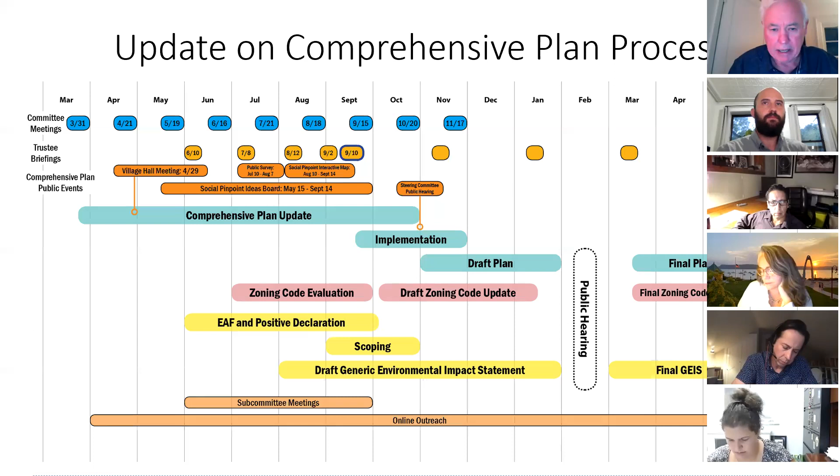So the next slide just goes through the basic introduction to this. When we started, we talked to Stuart, then the manager, and then Jaime as your planner. We've divided the zoning effort into two different groups. One is code maintenance, housekeeping issues within the code, some of which are very important, like definitions in the code and consistency of one part of the code to another. Village council, the building department, and Jaime Martinez are going to take the lead on that.

But issues related to the comprehensive plan, addressing issues raised in the plan, this is one of them, as well as the waterfront. So downtown and the T district are things that we'll be doing. Tonight we'll stress basically the downtown, and we've added also the Croton Avenue area. So that's the distinction between the two.

Jonathan is working now on amendments to the T district with Jaime, and also a new district idea we've had, a contextual district for infill housing and townhouse development, which was suggested to us in site visits with the manager, Karen, and Jaime. The idea of this MF3 district is it will fit right into your code and could be mapped after adoption of the comprehensive plan, but it will simply give the trustees another option for what we call the missing middle, as planners tend to call it. That's a zone a little between the T-zone and some of your existing multifamily zones in the code. But those two will come separately through Jaime and Stuart.

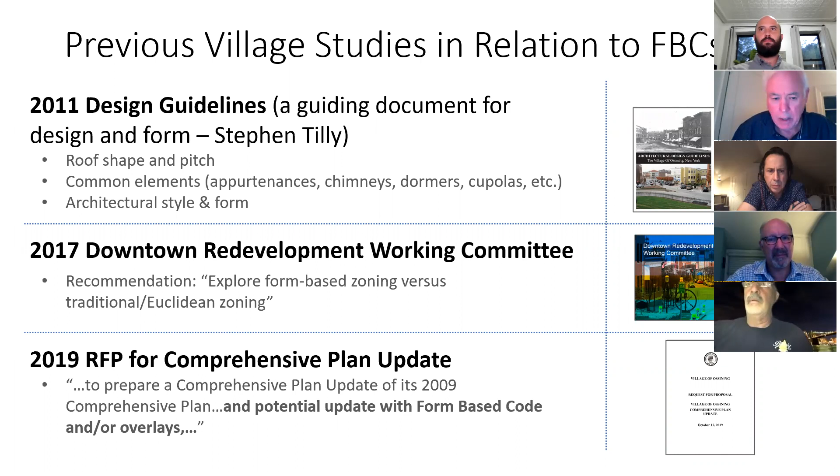I wanted to mention that with the form-based code, we're very cognizant of work that we regard highly, and I think the village does too - that was 2011 work by Stephen Tilly and company on design guidelines. We think this form-based code and Stephen Tilly's work can work complementary to each other, so that the planning board would still be able to use Stephen Tilly's work and at the same time use the form-based work. We're also looking at the recommendations out of the Downtown Redevelopment Working Committee on form-based zoning. So with that, go ahead to the next slide, Mark.

I'm going to, at this point, turn it over to Jonathan, who will get into the basics of the form-based code. Thanks, Frank. Good evening, everybody. I'm going to go through a few slides before we get into some specific details led by Mark, but I thought we might begin by defining what a form-based code is.

It's a relatively new type of zoning. It's been around for about 38 or 39 years, but over 90% of what's been adopted in the country has occurred since 2001. It's a type of zoning that really focuses on the built results, making those more predictable, and a high quality public realm. It does so by emphasizing or regulating building form, rather than separation of uses. It uses the physical form and the building's relationship to the street and the public realm as an organizing principle.

And if you think about it, it really makes a lot of sense, because you're interested in a variety of elements about zoning, certainly density, height, setbacks, these kinds of things. But if you use a form-based code, you actually prescribe how a building relates to its context and to its street.

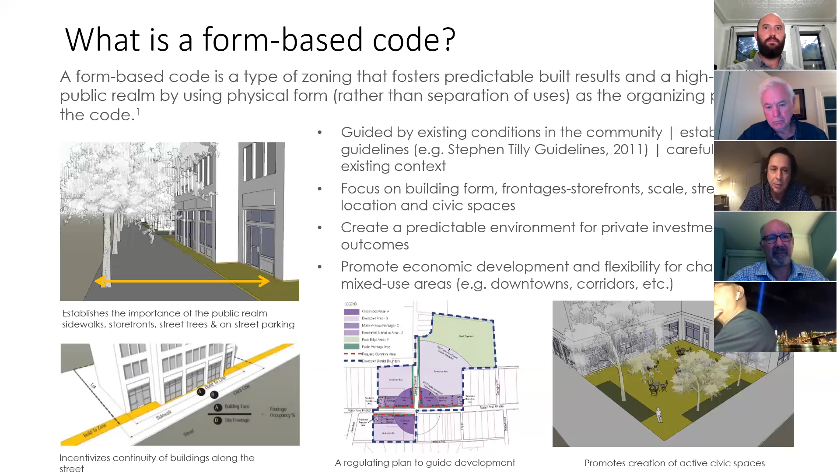So here is just a very light comparison between the two types of zoning that we have.

Thank you. So the typical zoning is called Euclidean zoning, and it has a focus on use. So really it came out of this idea of separating uses. Design is secondary, and it's often handled in a separate process. And that's indeed why, back in 2011, after the 2009 plan, there was this call to create those design guidelines.

So we had a guidebook, a guide to inform developers on the kinds of things that the Architectural Review Board, the Planning Board, and indeed the community was expecting. That focus is really, in Euclidean zoning, on internal lot parameters.

So if you look at most of the zoning in the country, and indeed your village code right now, it will tell you a lot of what you have to do on your site. In fact, it doesn't even reference the outside at all. And so the focus here is usually setbacks, yard widths, minimum height or maximum height, minimum yards, allowable density, and things like this.

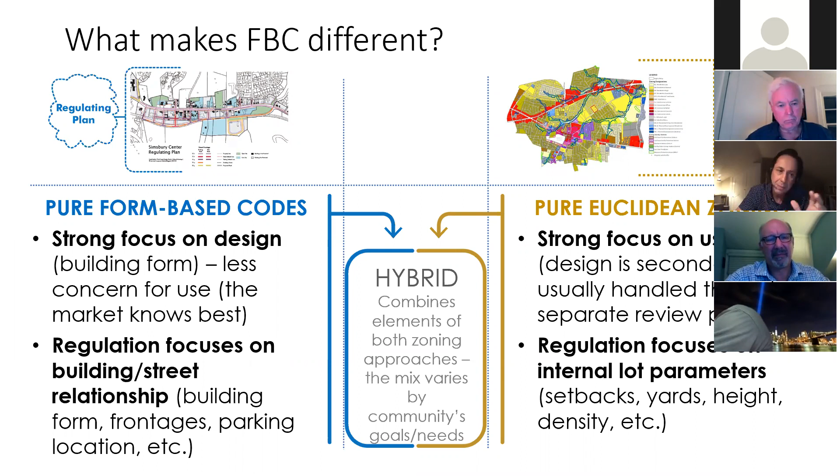The way a lot of people are going these days, and in fact the way BFJ Planning has approached this prior, is through a hybrid approach, which takes some of the best and the strengths of Euclidean zoning and some of the strengths of form-based codes. And so what we will talk about is a hybrid approach this evening.

If we could go to the next slide.

So there are three key concepts that are integrated, or can be integrated very easily, with form-based codes. These work well with a hybrid approach, and that is doing an overlay. An overlay zone is a special district that's created, and it places over the existing zoning. So the existing zoning stays in place, but the overlay identifies some special provisions in addition to, or instead of, those underlying the base zone.

Overlay zoning has been around for a long time. It works very well, and it accomplishes something else that is not in this definition.

It allows existing property owners to continue as they are, and they can opt into the new zoning if they like. If not, they can stay. That's very different than going in and changing the whole zoning, because then you end up with a lot of non-conforming uses or buildings. So this hybrid overlay approach is very efficient.

Incentive zoning is a tool that allows new development in certain areas, wherever you specify, to voluntarily achieve some extra floor area or other specified benefits that provide public benefits identified in the code. Incentive zoning is used to ensure that new development contributes, for example, to infrastructure investments where needed, or the provision of civic space or whatever it might be that is defined by the community.

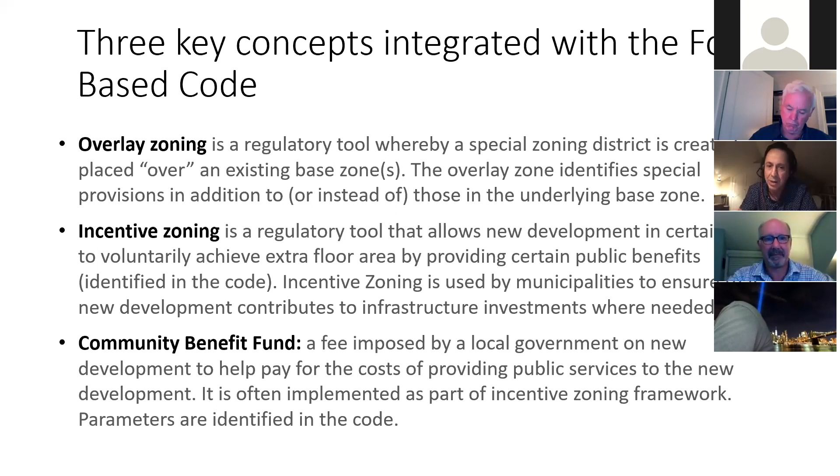It can be tied also with an overlay and the form-based code. So we've got these four elements working together: a form-based code, an overlay idea, this idea of incentive zoning, which is how you opt in—if you opt into the overlay and the form-based code, you get an incentive—and then the idea that there can be a fee imposed to pay for provisions that the community is interested in.

So the approach I've just spoken about—I'm going to talk very quickly about two local examples. One is a smaller village, and the other is the city of New Rochelle. Even though the internal parameters are a little different between these two—one is a village, one is a fast-growing city—the principles are the same.

If we take a look at this, they both specify or target key areas. They both work through this overlay concept. They're both hybrids, meaning that they regulate form and use. So this hybrid approach is very efficient, as I said, and they both include incentives.

In the village of Mount Kisco, this was some additional floor area—the ability in a particular area to do residential use that the underlying zoning didn't permit at the time, and slightly more height to make all of this work as part of that incentive.

In New Rochelle, the incentives are floor area bonuses, and they're quite dramatic. As you know, they have some very tall and even taller buildings going up in New Rochelle at this point. Not the context we're talking about tonight for Ossining, but this idea of an incentive encourages and incentivizes developers to opt in and do what you want them to do.

Great, thanks, Mark. Do you want to go to the next slide? Okay, so similar analysis, but this is for Croton Avenue.

And this is the NC2 district here. You've got some other zoning districts that come down, but again, a similar analysis of stronger frontages and weaker frontages, stronger shown in green and the weaker ones shown in red.

Now, I think Manny at some point at a previous meeting asked what I meant about stronger and weaker. Really it is back to a sense of completeness, holding the building-street relationship together with more continuity at various points.

So if you can see along Croton Avenue down towards the CVS and the supermarket, right there, the supermarket has a small wall with some wrought iron fence. That's a very different experience than even right across the street, where you have a relatively new 3-story building with podium parking shown directly above in the photo. That, in terms of its building-street relationship, is a very strong condition for a corridor, especially as it approaches closer to downtown.

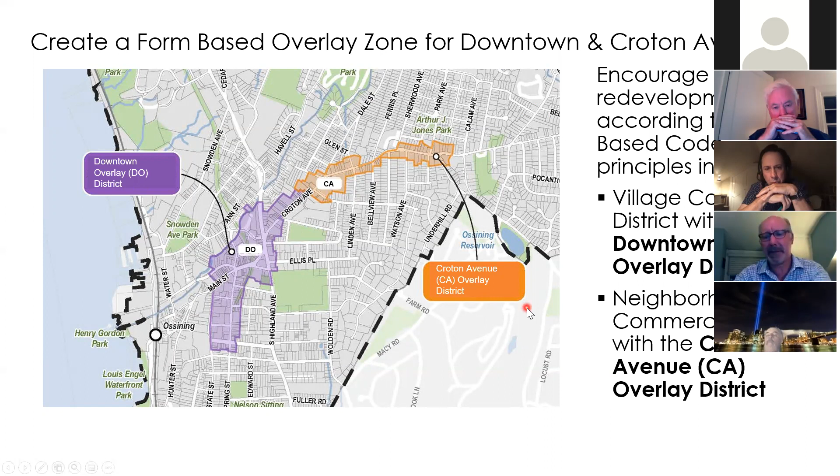So that's the where. In terms of, I think you heard Jonathan talk about the role of overlays and incentives to encourage a better quality and caliber of buildings and design, the concept is that opting into the overlay requires, first off, participation in the community benefit fund.

We have to work out exactly what dollar amount that might represent. But the key concept is that those community benefit funds would support improvements to things like parking and civic spaces, or possibly schools. You all can decide where those funds should be prioritized.

When an applicant comes in and says, hey, we're interested in opting into an overlay zone—in this case, the downtown overlay—the underlying zoning allows 4 stories and 48 feet as the maximum building height. And the underlying zoning places residential uses as a conditional use.

In these areas, residential is only permitted if there is a commercial use underneath it on the first floor. So it's a fairly limited set of circumstances where you could have residential over commercial.

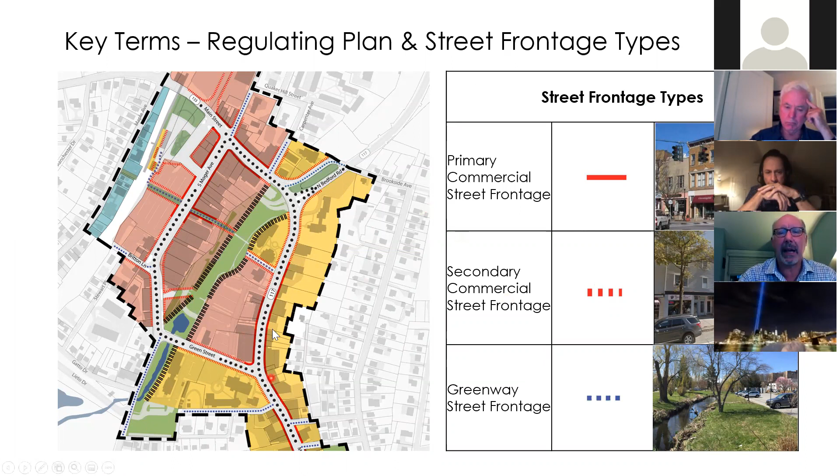So that's this notion of street frontages, where you're setting the rules for what's the character of that street or that piece of a street.

One of the goals of many downtown or village neighborhood commercial areas is to create active environments where pedestrians feel welcomed, where outdoor dining feels comfortable, where the sidewalk is gracious and large enough that people feel they can walk along it. Maybe there's some on-street parking or some benches, but this notion of where the private frontage — storefronts, windows and doors — meets the sidewalk is the interrelationship that makes successful commercial districts thrive and great neighborhoods feel comfortable.

So typically in the code we may call for a certain frequency of doorways or a certain minimum percentage of glazing or windows so that they feel right. If this was an outdoor dining area but this was 100 feet of blank wall, it wouldn't feel like people belong there, and if there's no entrances, there'd be no reason to go in or out or be on the sidewalk. So we want to make sure there's at least a minimum amount of visibility in that area.

A couple of the other key concepts, I think I showed them in the diagram earlier, but this notion of a build-to line, this gold line right here, is usually within a few feet of the front property line.

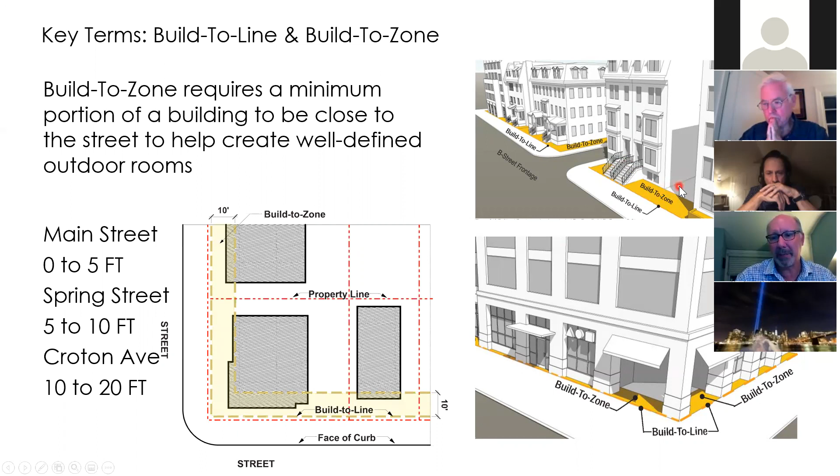These diagrams show an example of how a storefront comes up to that build-to line and occupies most of that frontage. Here you see a townhouse style building with a walk-up, where the building isn't all up to the street. There's some sort of a side yard there.

I wanted to ask, just to clarify for everybody in case it's not clear: in the current zoning we have setback minimums. This would include a setback maximum as well. So that is correct, a minimum and a maximum.

It doesn't mean every part of the building has to comply with that. This concept of frontage occupancy says that in your commercial district, buildings should occupy at least maybe 60% of that zone as a minimum, whereas in a typical residential street maybe that's 40% of the front lot width. So if your lot width was 100 feet, the building should be in that yellow build-to zone for 60 feet of the 100 feet. If it's a residential property with a 100-foot wide lot, the building should be 40 feet wide in that yellow zone. So it sets a minimum norm.

We create these outdoor rooms that we think are a core element of what makes for a successful street, particularly in a commercial district. If we had a storefront on this side and a storefront on this side, and then 100 feet of parking lot in between, when a customer is walking down the street considering whether to go to that next block, if there's a 100-foot parking lot with no activity, no storefront, nothing to look at, no street trees, no landscaping, many people will turn around. So many neighboring properties could be unsuccessful in getting customers because somebody was allowed to build a big parking lot in the middle of what was otherwise a thriving commercial street.

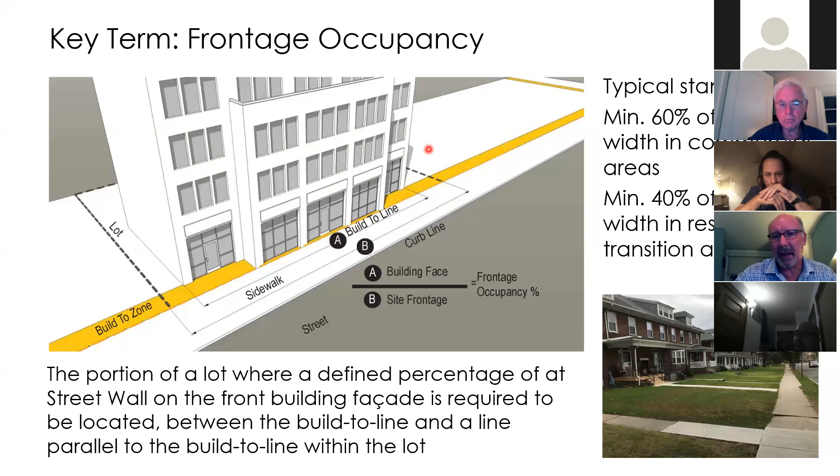I wanted to follow up on that statement. There's this one spot where Croton Avenue actually gets broken up by Walgreens, where there's a big interruption with a huge parking lot set out in front that didn't necessarily need to be there, not in the front at least.

So I think now I'll introduce a couple concepts as to how these form-based code principles could apply to Ossining, to the two districts. I think we really look at this as us looking at the DNA of your community, both the architectural DNA and the urban form, and making sure we understand it and replicate it. I'm not talking about copying buildings, but at least making sure the forms are similar.

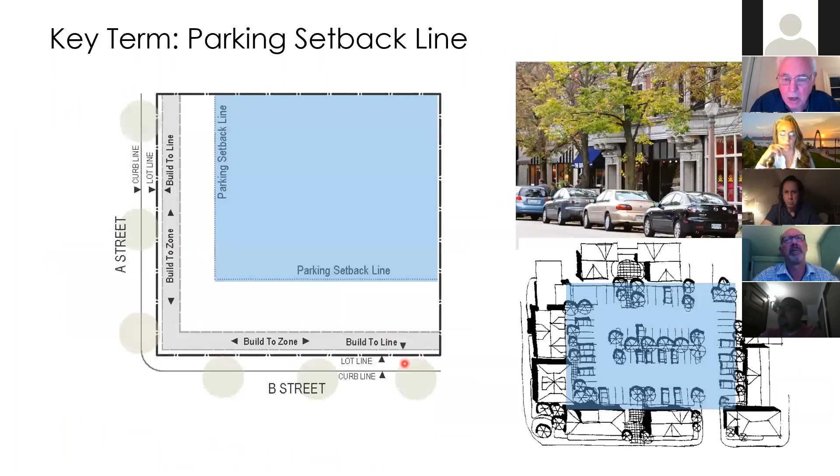You might want to go back to the two maps that Jonathan covered, just so the Mayor sees them. And Mayor, to your point, I think...

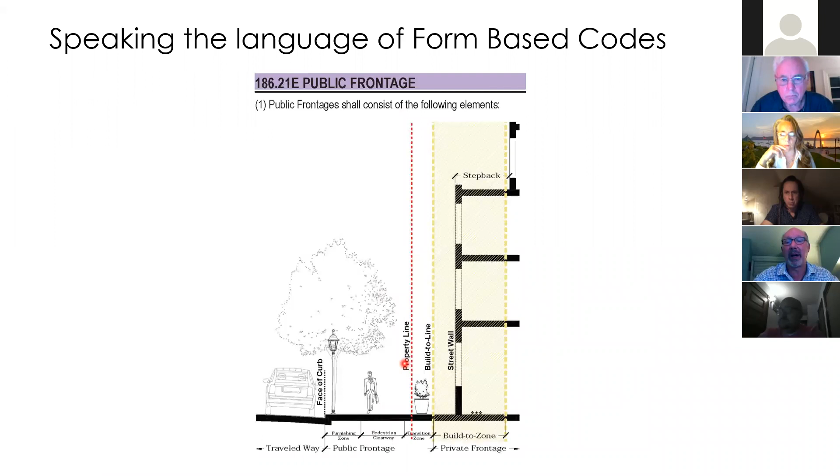These regulating plans, we do need to go through a process of vetting what should they be, which streets are most appropriate for primary commercial, which ones are most appropriate for secondary commercial. These are up to interpretation, and obviously ultimately we're prepared to make some recommendations, but it certainly may need to be refined as we go.

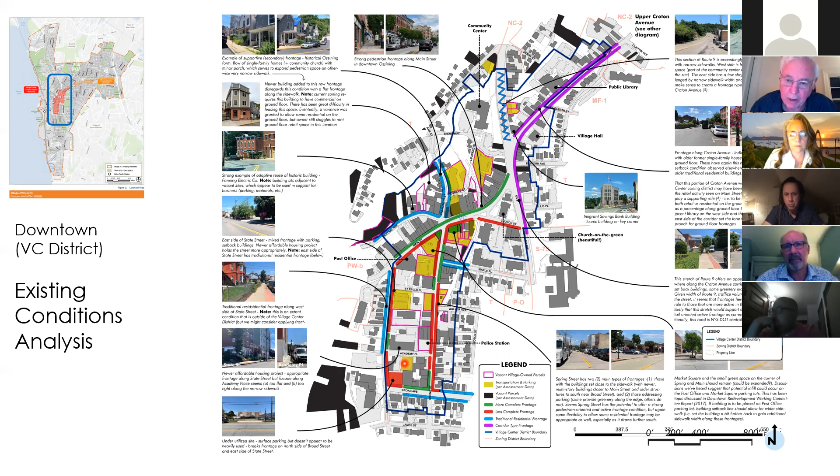Yeah, these are the two maps, Mayor, the existing conditions for downtown, and thoughts from Jonathan and Mark on the existing conditions. As Mark said, these existing conditions set the basis for the form-based code. The second map here does Croton Avenue in the same way. We did these simply because, remember our waterfront walk, we wanted people to have a map for downtown and a map for Croton Avenue to make notes on. But at a later point, since we haven't quite completed everything yet, we wanted to get your input this evening, and then Jonathan and Mark would follow up and make completed maps of recommendations for downtown. Would it be possible to include a map of what we were looking at just previously?

If we're talking about the existing conditions and how that would translate into the different districts of commercial versus secondary versus neighborhood, I feel like we'll do half the conversation and we may not get to specifics, like I personally think secondary business should be permitted all the way up to Broad Street, up both State and Spring. But I'd like to have that conversation with you when we're there, in case something else comes up. Those are things that jumped out at me while you were talking today.

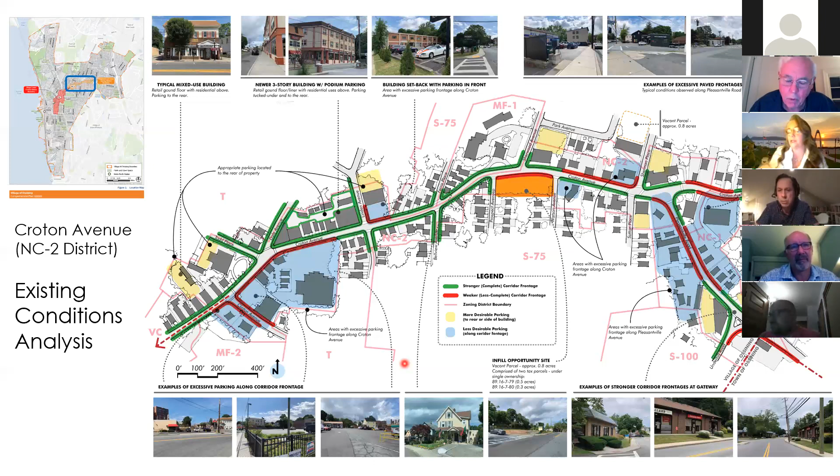Yeah, we can try. To tell you the truth, we made copies of these maps just today, but Sylvia is in the office tomorrow, we can try to make it work. I don't want to promise it though. Instead of creating more paper, if this is going to be available to us electronically, then I can just look at it while we're there. I'm just telegraphing my question, I just want to be able to have that conversation when we're in the field, rather than going into detail now, because I may be imagining something that when we're there, I'll see it differently.

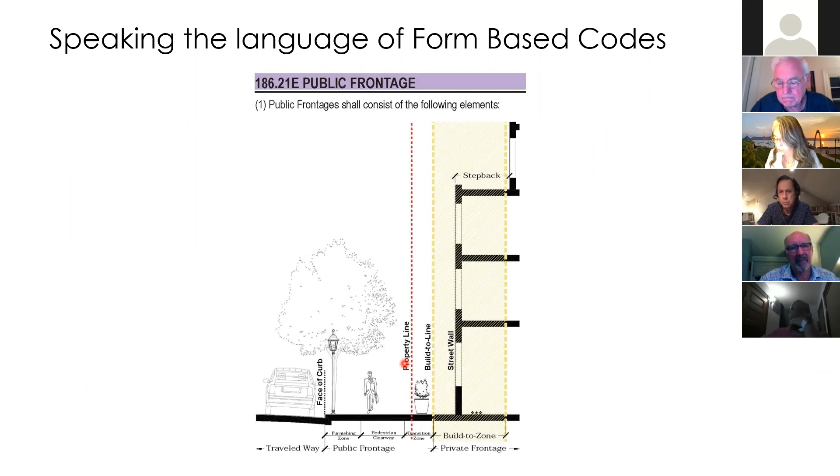So then the one other question I had is, you did that really helpful conditions page on the frontage with the different pictures of existing buildings. And then when you get to the next one where you show on the bottom row what that looks like, those are really helpful for understanding frontage.

One question I'm going to have when we talk about the overlay zone and the incentives for height. Right now, so this is one, the 147 Main Street infill right across from Market Square is a 5-story building. That's one of the only 5-story buildings in downtown right now, so I don't think there are very many buildings of similar height. I don't remember the specifics of how that was incentivized and permitted, that was built my first year on the board, and most of the negotiations had happened before that.

We do have some buildings that are now as of right, which is commercial mixed use with 3 stories of residential on top. I can picture one for sure on Spring Street. So one of the questions I'd be asking when we talk about incentives for these overlay zones is, are we starting at the right point with as of right as 4 stories and incentivizing 5 stories? Or should we consider as of right as 3 stories, which is actually what exists most places as the max with few exceptions, and then incentivizing 4 stories? So that's one of the questions I'll have.

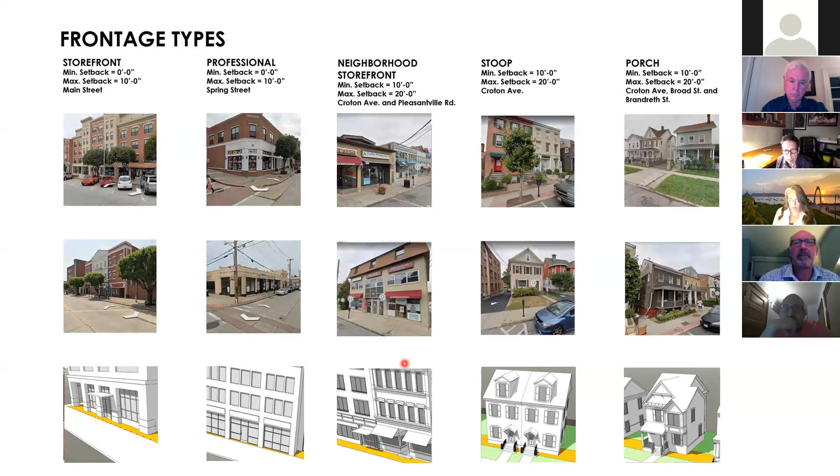Thank you, Mark, and that's helpful. So if you were to go back to the last map where you were talking about — that one right there, no, the one before that, that one right there. So the primary use that you were talking about, the frontage, is, if I'm looking at the downtown, Main Street, parts of Spring Street, St. Paul, and a little bit across the street from Waller, sure, and then parts of Church Street.

We already have that, you know, the commercial part. We have part of the commercial and the retail, and we have residential on some of them, not all of them, on some of that already. So, you know, how is that?

And I don't see, you know, obviously as a village, we want to try to maintain the character of a village. I personally don't want to become, you know, New Rochelle. I don't want to become Yonkers. I'm not opposed to development, but I want to make sure that, you know, my concern is how do we make this work to what we have?

Because portions of this, if we were to go to a form-based code, if let's say we do all these things, if a new developer comes in and says, look, I want to do this, and we are meeting all the categories that you stated in form-based code, they don't have to go in front of the zoning board to get a variance for, you know, front yard, side yards, or even parking at that point. But that's what I think — when we start getting to a little bit more of the details, I want to understand that better.

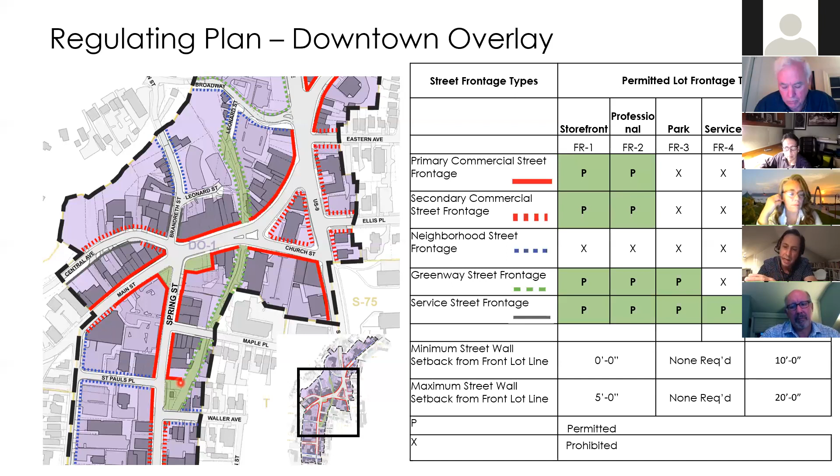The form-based code, at least in the secondary frontage, would give a bit more flexibility. You could still have a portion as retail, but also have a residential lobby entrance or a forecourt. That flexibility is not currently available in your code, so that developer would have to go before the ZBA through a long process.

I'm not saying we have it right—the mayor brought up great points, like let's look at these frontages more closely. But what we're trying to do is build in more of that flexibility, and book it in, saying here's what you can do, because we've decided this is what's going to work. It's not one size fits all where everybody has to do commercial across this massive swath of your downtown.

The fine detail and diversity of frontages contributes richly to downtown. Finally, allowing residential more easily downtown is a very strong plus, especially given the retail conditions, and the fact that having more people living there as patrons would make that downtown a living environment. That's where we're coming from—we're not saying this will encourage development everywhere. The existing zoning remains and protects existing property owners.

I'll stop there. Maybe Mark has about five or six more quick slides. If we could show those, we could give you a big picture.

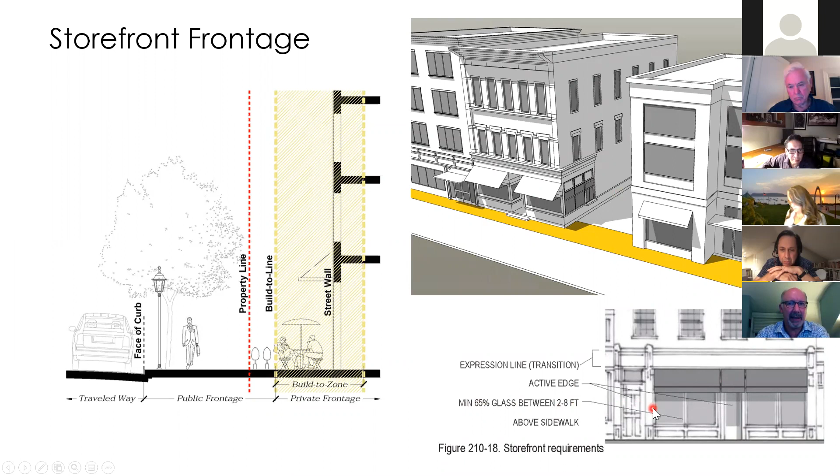So the diagrams we identify for each of these frontage types show storefronts as a frontage type, with some minimum amount of glazing, maybe 65% or a certain amount of glass. A blank wall doesn't make for a storefront, so we need some minimum amount of glass along the street. Here are examples in your downtown where that kind of frontage exists.

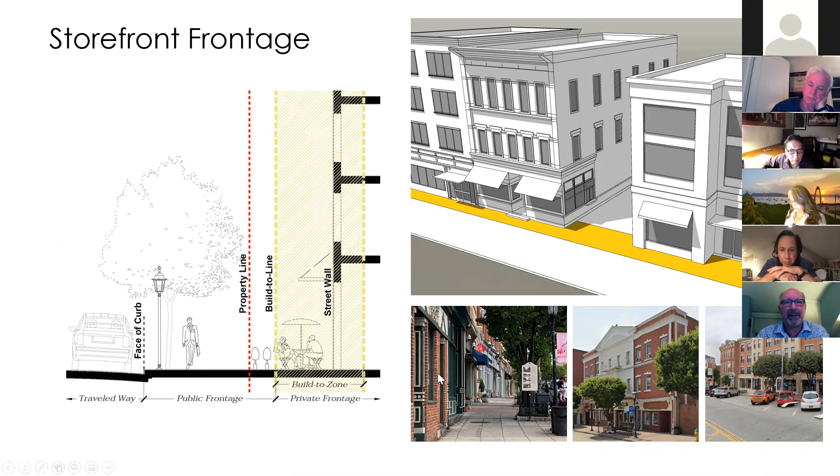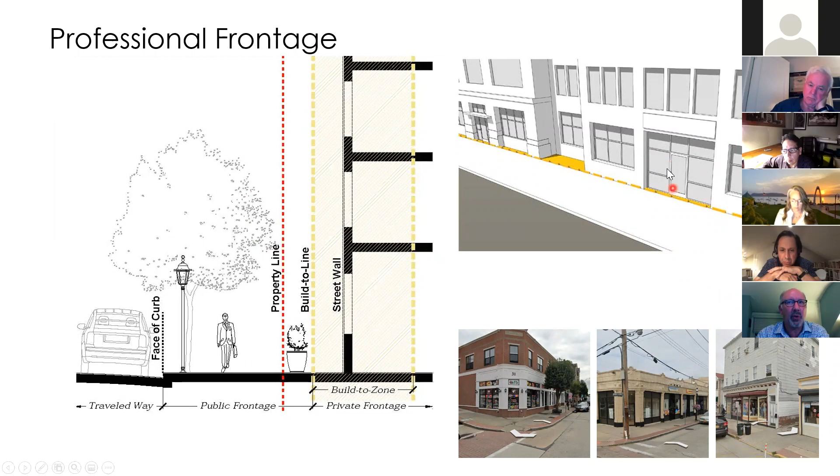The professional frontage is where the windows could be slightly smaller, more of an office setting, and maybe a little less of a true storefront retail environment.

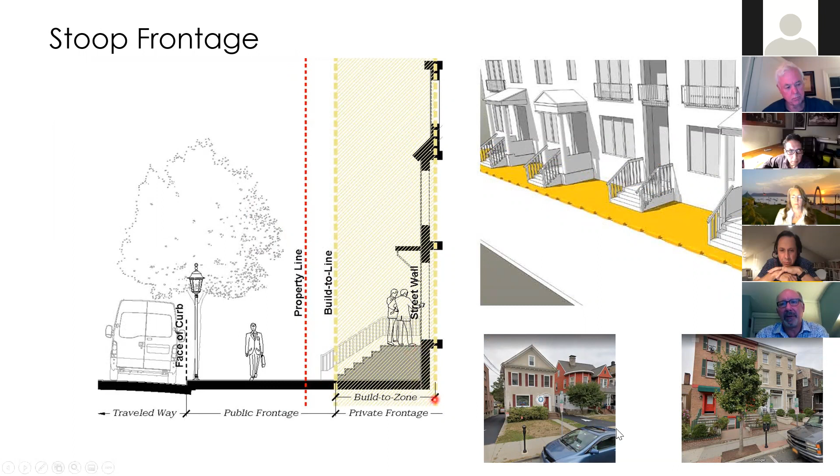And there's one other typology here, the stoop frontage, a situation where you would allow the building to be 2 feet, 3 feet, 4 feet above the sidewalk as a permissible condition.

The other key element is that creating dynamic downtown environments and vibrant streets sometimes needs a place for programmed activities, where you can have an amphitheater, a band, a concert, or a choral event. You have those civic spaces right now at the corner of Main and Spring, but right now they're surrounded by parking lots.

With the right fine tuning of this code and these standards, we could identify where certain kinds of frontages might open onto those civic spaces, so you could have a restaurant, a public space, or some sort of semi-public environment opening onto those green spaces.

And those civic spaces could be small, like a pocket park. They could be narrow, like a pedestrian way. They could be a corner green, a larger square, or, in the case of what you have right now, a greenway. Those are things we would permit and promote, allowing those things to happen.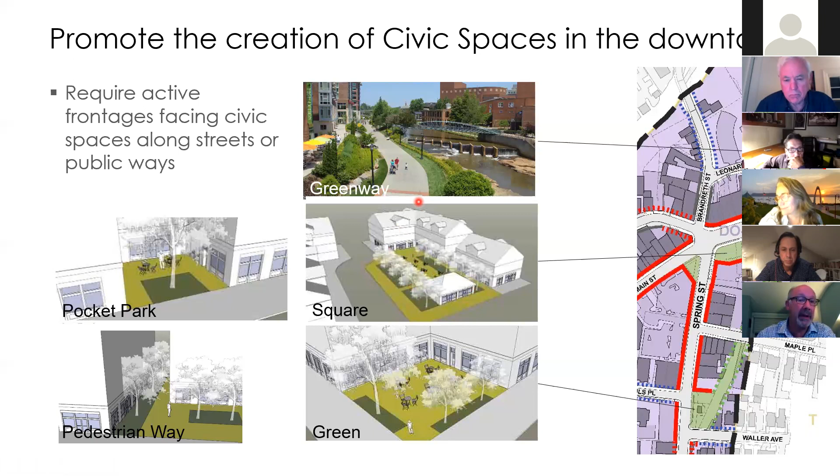So that's to be determined, and maybe that's one of the target uses for the community benefit fund. Maybe it helps fund some of the improvements to these areas.

And I think this is almost my last slide here. I just want to zoom in a little bit. Clearly you have, in front of your post office, a number of parking areas where, with some refinement and fine tuning, we could work with you to identify the right combinations of incentives and forms.

And one idea, picking up on your comment, Mayor, this notion that many of the areas in the downtown are 3 stories, maybe 4 -- 5 is clearly the exception, not the norm.

There may be areas where we say something we call a step back -- this notion that maybe you go up 3 stories, and if you're going to have that extra story, maybe it's set back 8 feet or so, so that it's a good neighbor to the neighboring properties. If most of these buildings are 3 or 4 stories, maybe that cornice line is set at 48 feet or some number.

And if there was an additional floor allowed, it might be stepped back a couple feet from the sidewalk, and would be a better neighbor to the adjoining properties.

The other thing we talked about was the notion that maybe residential uses could or should be permitted on the first floor. In certain areas they may be appropriate on the first floor anywhere, and on certain streets maybe they're only on the first floor if they're more than 40 feet back from the sidewalk environment.

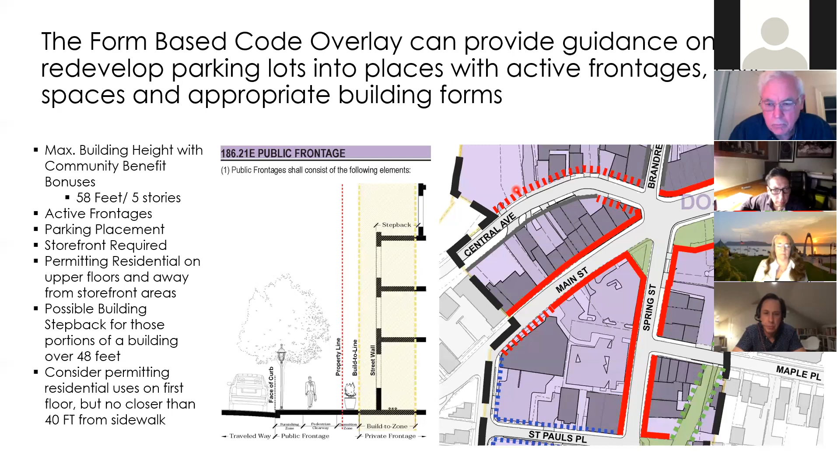So just a couple -- those are things we're going to explore together. Hopefully most of these key concepts have come across.

In the end, this form-based overlay is about reinforcing the high quality buildings and street experiences you have right now, and making sure that those patterns, those forms, those sidewalk conditions, those civic spaces, those storefronts and building facades are good neighbors to each other and create an even stronger sense of identity and place in your downtown and along Croton Avenue. So I'll open it up to any other questions.

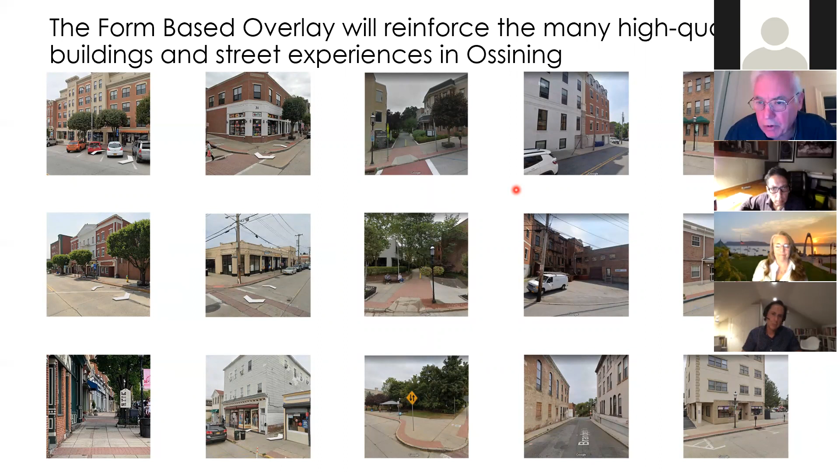I think we have just a concluding slide or two, right? Yes, we do. Yep. Why don't I do the -- is it okay?

Sorry, I just want to ask one question before you go too much further. Mark, when you were talking about the incentives and doing setbacks for height, how important will the height be in considering, in incentivizing development that's cost effective and viable?

There are fire codes and building codes that make it difficult to build new construction of one kind of use on top of another. For example, when you're trying to put a residential use on top of a commercial use, the structural grids of a commercial ground floor space are invariably entirely different than a residential structural grid. The mechanical systems are entirely different, and the chases, where you'd have a restaurant with a vent hood going up, create further complications.

So the bottom line is, there are many kinds of buildings that we see built from the 1860s, 1890s, and 1920s that may have been cost effective back then, before fire codes were what they are today.

I think there are many examples of where municipalities pass zoning ordinances to say, only 3 stories. Well, if you had 2 stories of residential on top of 1 story of commercial, you will find very, very few examples across the country where it's economically viable to build that. You will find that at least 3 stories of residential is often required to make the pro forma numbers work for economically viable development. So I think this is a key consideration in understanding what is a market viable alternative.